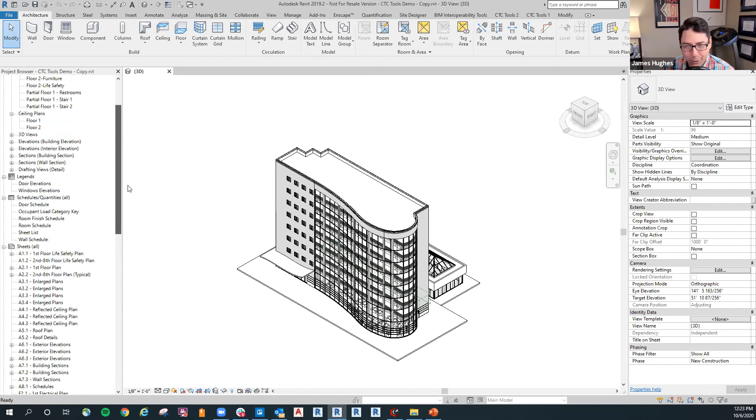And so what ended up happening, all of the large juicy projects started going to, and I'll call him Matt since you're Matt, Matt, the associate, middle management, and then all of the crummy re-roof jobs and parking lot jobs and post office jobs kind of kept coming to the other associates, and they started getting resentful of Matt, and it caused this unforeseen, really awkward political situation.

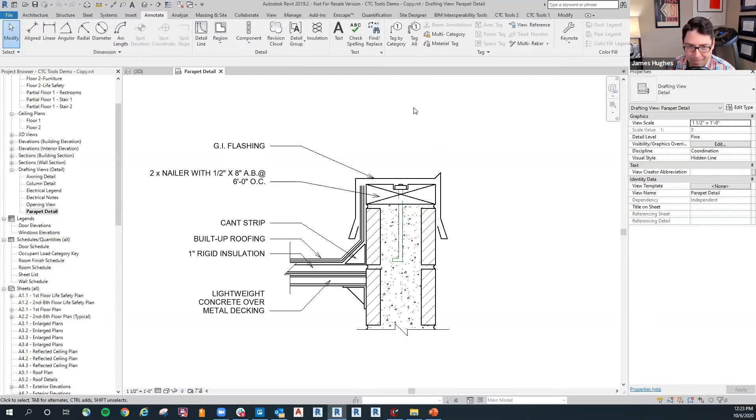And Matt was asking me to help him to be able to deliver these projects. And now all the other associates are upset with me because I'm giving my time to his projects instead of helping them with theirs. So ultimately Matt left that firm and they did not transition. I shouldn't laugh about it, but now I can look back on it and think, yeah, I could see how that would cause a weird political thing that would be hard to see.

Yeah. Okay, James, I just noticed we have had some questions pop in that weren't in the chat, but in the question and answer. Yeah, I've had chat open instead. Yep, there's Q&A. Let me open it too. So we have, what are some of the best practices for migrating AutoCAD detail notes to Revit Keynote system? And then we have a similar question. Do you have a way of implementing user keynotes in a drafting view?

So that's a great question. And there's a lot of discussion about keynotes. There's two basic methods you can go about keynoting drawings. And I'll just quickly show both. And there is a quick way and there's a really good way to migrate from AutoCAD. Okay, so here in the user interface, over here in the Annotate tab, and just a quick note, this is really helpful to new users that I always point out.

We have a lot of tabs up here and you spend most of your time in this one, and in this one. And the biggest difference between Architecture tab and Annotate tab is anytime you're working in this tab, which is grayed out for the most part because I'm in a drafting view. So anytime you're in the Architecture tab, just know that you are populating the model in a 3-dimensional method, and it will populate in all views. Views are simply cuts of your model, okay?

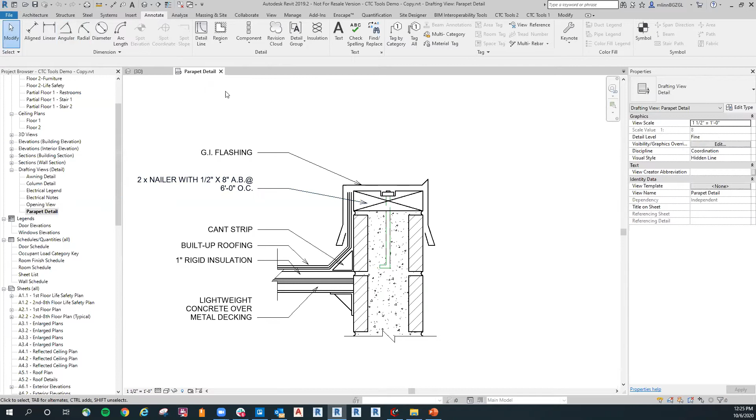By contrast, when you are in the Annotate tab, these are what's called view-specific commands, and it's only represented in the view you're in. So when I use any of these commands, again, Annotate tab in here, they will only be shown in the parapet detail, which is a drafting view. And again, these are grayed out because these are specifically for model elements.

Hey, Matt, this detail, is it still an AutoCAD detail or has it been transitioned over to Revit? It's Revit. Okay. Yeah, I see it now. Yeah, this is Hotel Final. You recognize it, James? I do. That's the parapet detail. Okay.

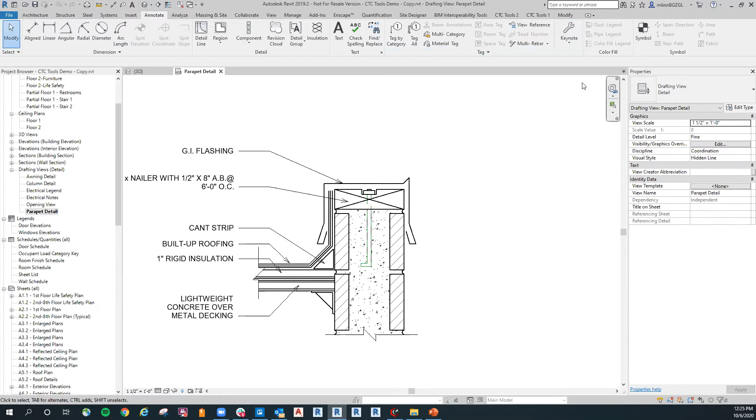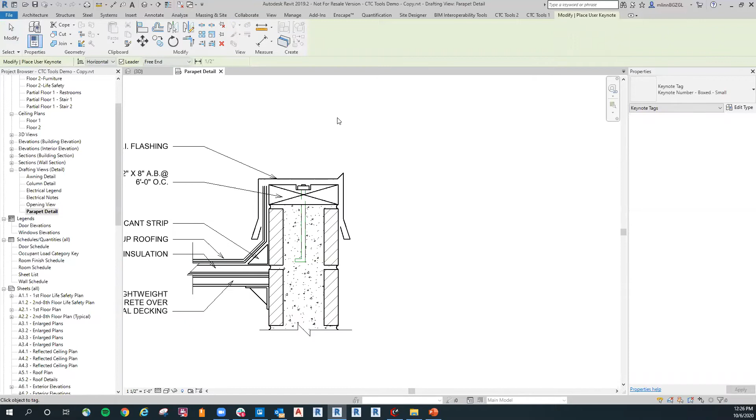Okay, so the first one is using the traditional Keynote here, which is, again, in the Annotate tab, Keynote. And you have several options here, and we're not going to dig too deep into them, but I'm going to use this one for drafting view. And you come over here. This is your type selector, and you can choose any one you want. I'll do Keynote Box. And then, let's see. It's not working because there's no elements to grab. Okay, bad example. I'll come right back to this one.

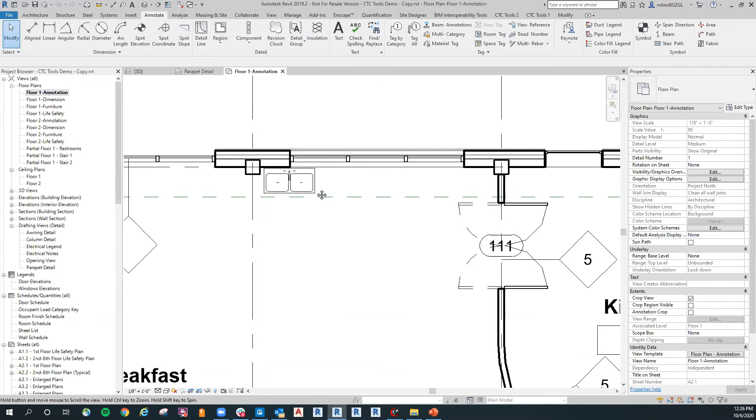Okay, so I'm going to jump over to a plan real quick. Okay, Keynote, and this time I'm going to use Element. Like I said, there's three different options. There's Element Keynote. So if I point to this, it brings up the Keynotes dialog. So specifically, the question was how to migrate from AutoCAD. This entire dialog is reading a text file. So if you have a database in AutoCAD, all you have to do is load this text file into here, and then these become your keynotes.

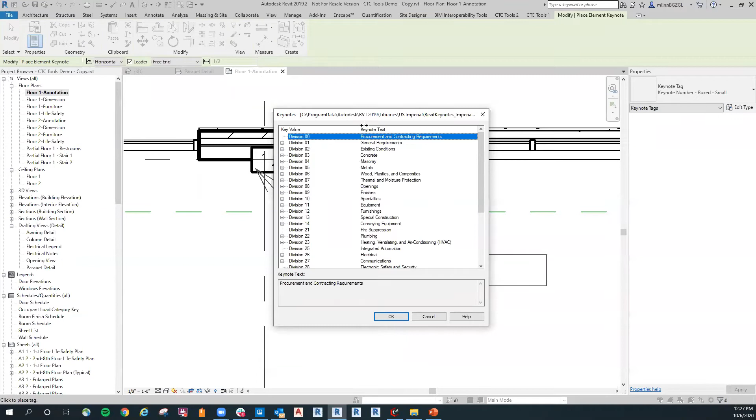Now, this is the one that comes out of the box from Autodesk. And you can see it's divided by division. So what do we have here? We're looking at a column. So I could go to concrete, structural concrete. We'll say that's a 12 by 12 column and say, okay. Okay, and it'll fill out automatically like so.

Got a question from Josh. How did you get the plus?

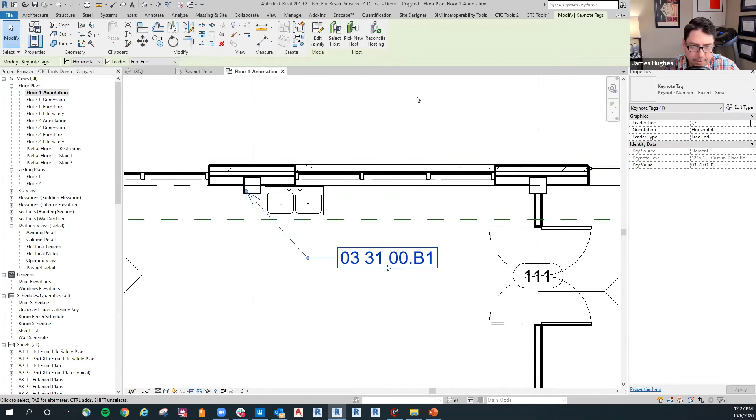The plus. I'm not following. Do you understand? If I knew which plus he meant, I would have said it. Okay. Like, where did the tree come from? Okay, yeah. So as soon as he striped it with the element keynote, it opened up, in that case, CSI division for the keynote, because that's what his keynote text file is written as. Oh, are you talking about these pluses? I think so. Okay, great question. Where did the tree come from?

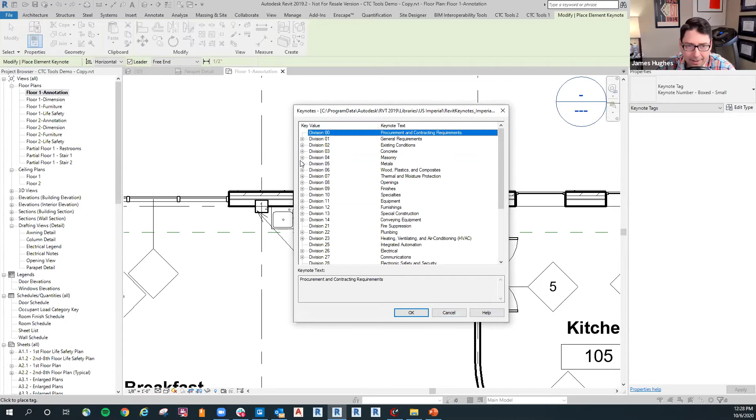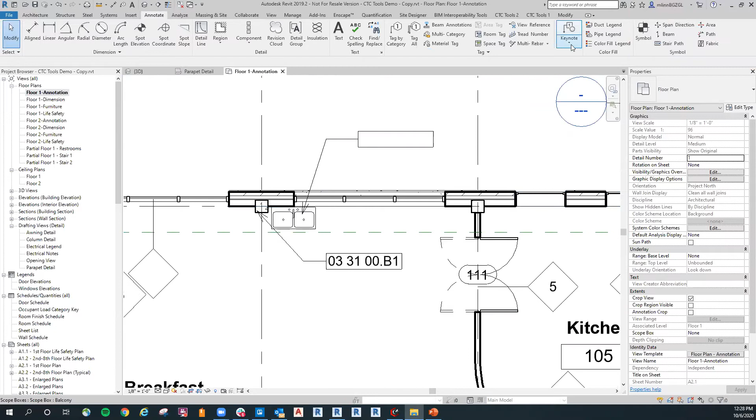Yeah. So the tree is how it's drawn in your text file, and it uses, what is it called? Tablature something. I forget the exact name. James could probably think of it. It's tab something. It's what you call certain text delineated files, or delimited. Yeah, there you go. All right, so if I come to Keynoting settings, here's where it's drawing from. So I'm going to copy this and open this text file.

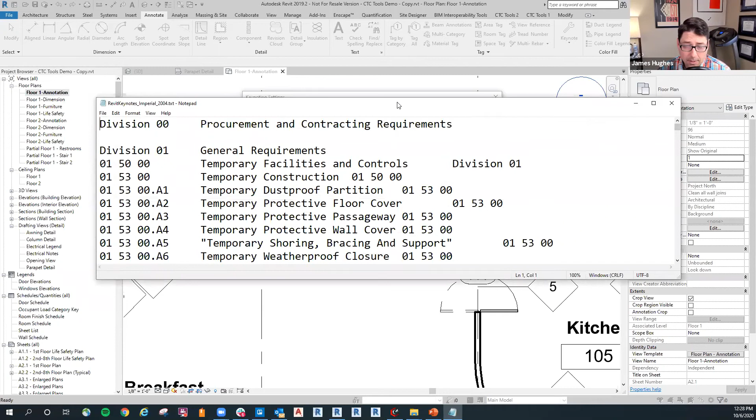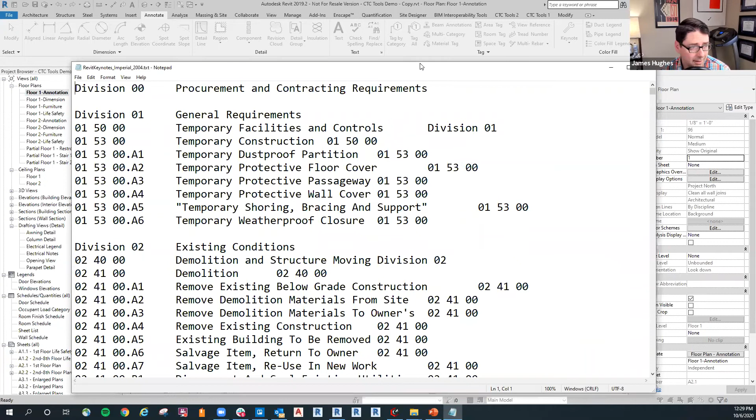I'm working on another screen here. Hang tight. Hey, Matt, the reason why the detail view that you had just a minute ago would not keynote is because that was simple line work. It wasn't brought over to be detail components yet. Now you could change some of those components out to be detail components, and then that keynote system will be basically tied to it.

Okay. Thanks, James. Wow, we're opening up the Keynote file during this presentation. You're trying to spook people. No. I'm just trying to answer the question.

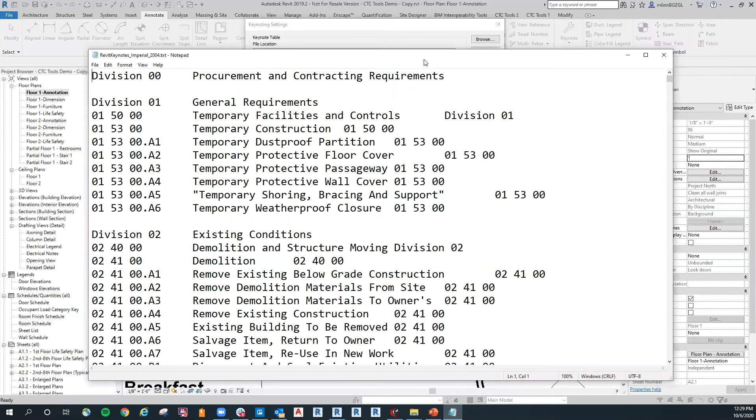So this is relating directly back to the plus sign question. This is simply a tab delimited file. Here's the keynote itself, and here's the description of that keynote. Same thing here, division 0, division 1. Now, there must be one tab between here and here. It's looking for that tab, and that's how it recognizes it. After that, if you have another tab and then something here, it will file this under there. That makes sense? Anytime you have a tab, and you can keep going.

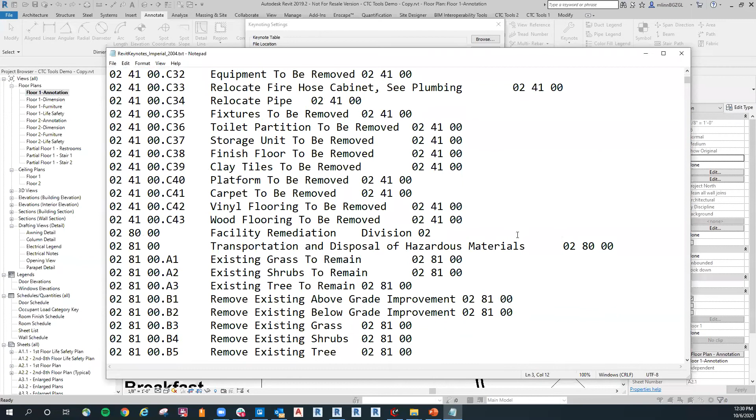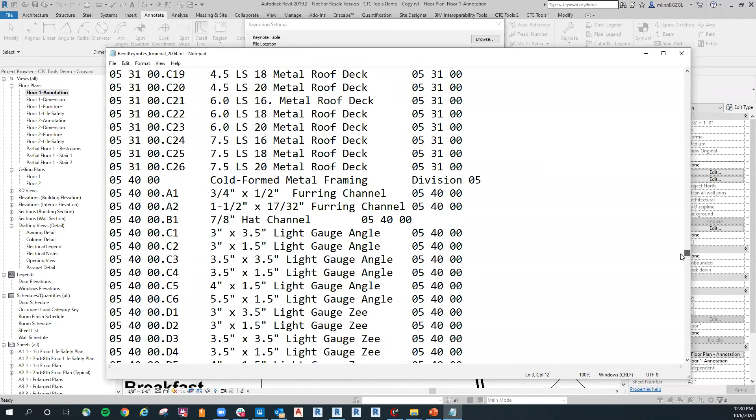So if we go down further, I'm sure there's some examples where... At some point an architect's going to look up and be like, man, I didn't go to school to be a coder. You can work with just the basic CSI division Keynote. That's what most firms start with before they start modifying it, or before they overhaul it. Right.

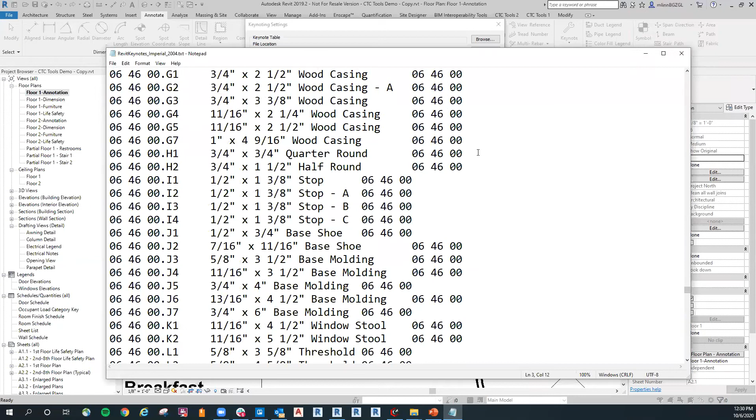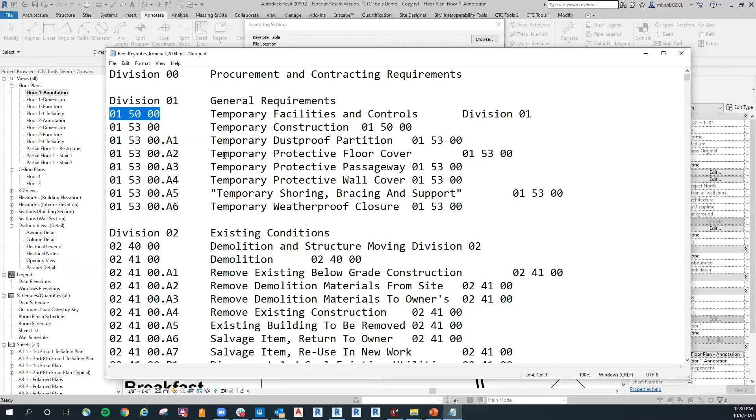Okay, so you can see this one will be filed directly under division 1, and this one will be another plus sign filed directly under this one. So if this does not go all the way back to the top, but here instead, it'll be a second plus sign. So that's how the tab system works. I'm going to come back out. Yeah, and Josh, to answer your follow-up question, that's the out-of-the-box Revit Keynote file. It's just a TXT file that gets installed when you install Revit, and that's exactly what we were looking at.

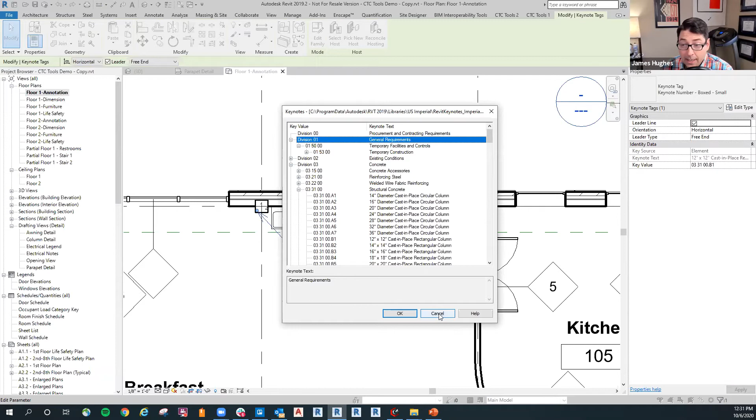Now, Matt, there's 3 different ways to keynote something. Matt chose the user-defined one, which lets him browse to it and assign one. Click on the down arrow under Keynote, and I'll verbally tell you about these other 2. You've got Element Keynote and Material Keynote. Element Keynote you would use if you want to point to a modeled object like the sink. It fills in a parameter value tied to that 3-dimensional element, so anywhere in the model you see that element, whether in section or wherever, it will keynote with that same keynote. And you don't have to use a number system; you can use plain text as well.

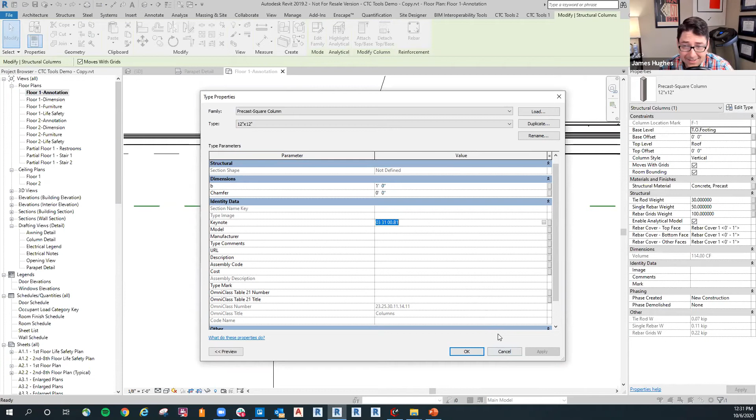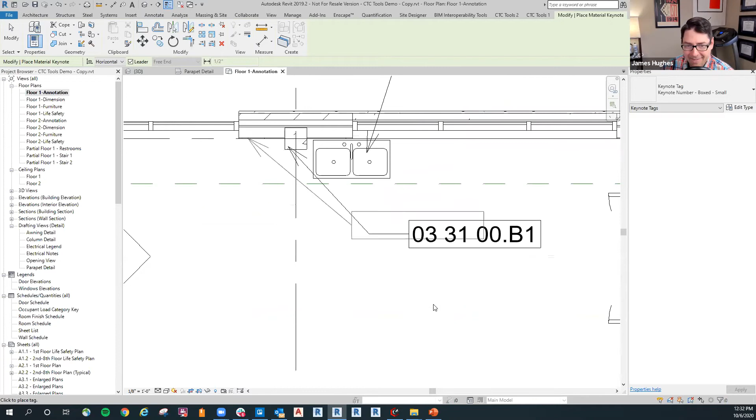The other part is you've got a material keynote. So if you're doing a wall section as an architect, you can point to the sheathing and make it say 3/4 inch plywood sheathing, and it will recognize the material value. Well, actually, I wouldn't be specific and say 3/4 inch plywood because you might have 1/2 inch as well, and it would get confused. But it will park that data with that material, so the plywood itself would have a keynote value assigned to it. And a user keynote is normally going to be for your detail components, which are flat 2D view specific, like flashing.

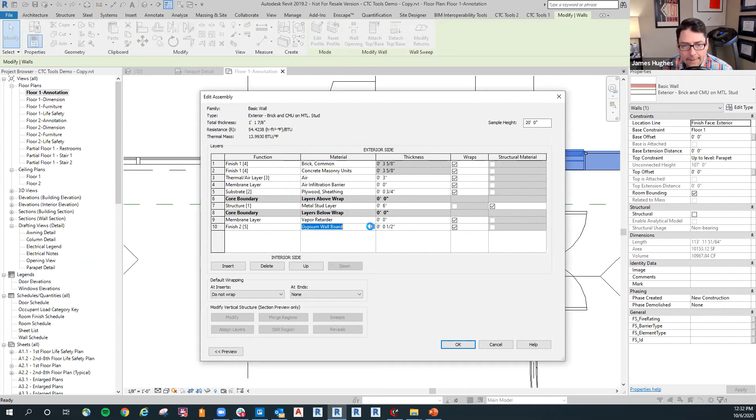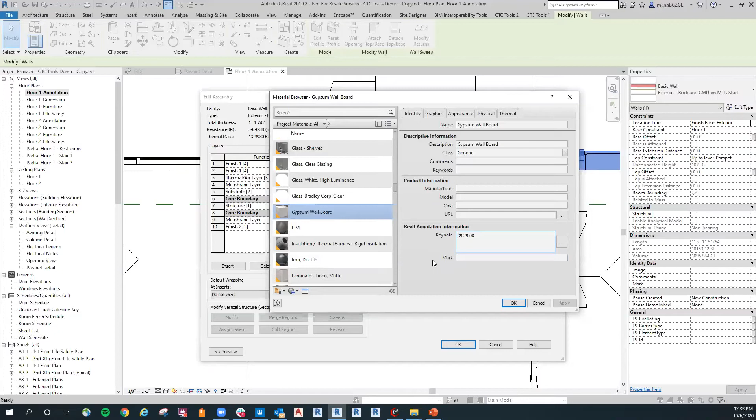Awesome question. So here's a continuation of exactly what James is talking about. In the first case, that parameter value was assigned to the element, as the name implies. This one is a material keynote, applied to the material, and it's indicated right there. So it's just 2 different places of storing that data; you can assign it to either the material or the element itself. And ultimately, they both make it to the same legend. You use all 3 of them, and they'll all make it to the same legend. And the legend populates itself based upon which keynotes are in use on that sheet, which is real slick.

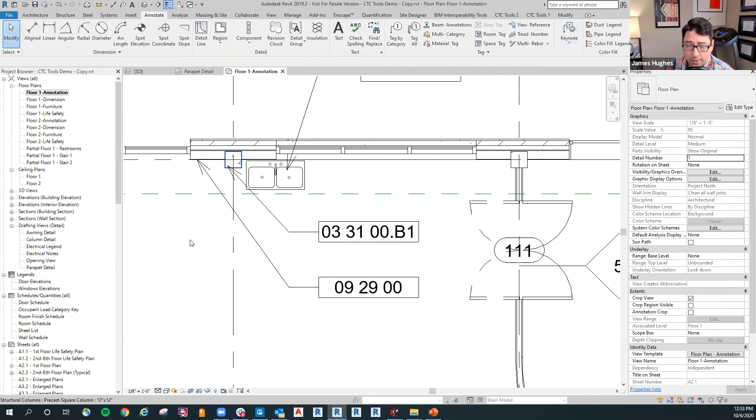You can do it per sheet or per project, either way. Yep. Yeah, some people are like, well, I want to do it per... well, that's fine too. You can do that. I don't mean to impose my own standards on people.

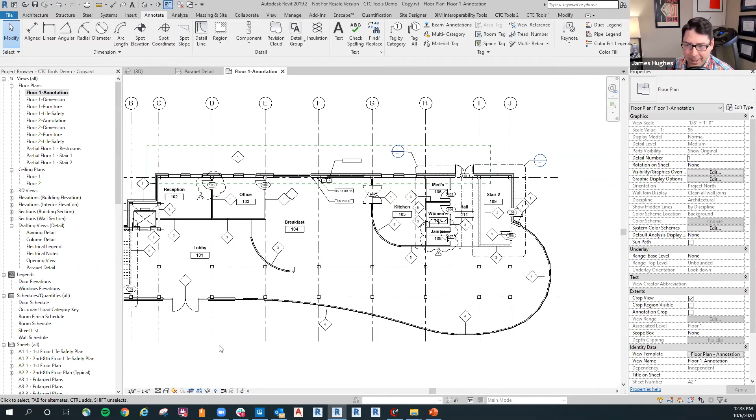So look, another way I've seen a bad transition into Revit is by having a new hire and saying, here's a 4-year-old Revit book that we got from a training 4 years ago. Read up on that because we need you to start such and such project in Revit in about 2 weeks. So chop, chop.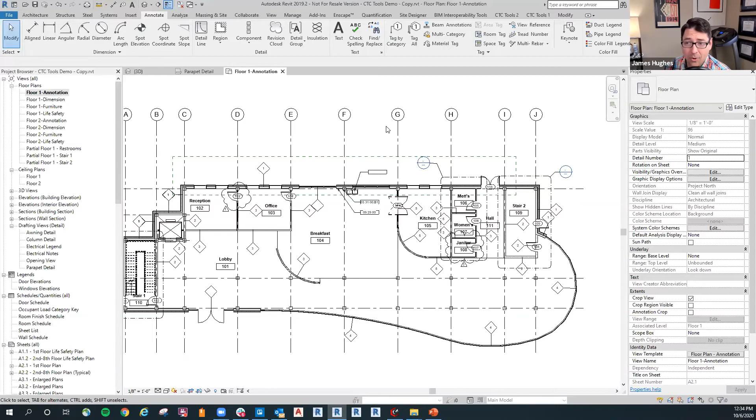I actually had that scenario happen to me here in Central Arkansas, and became a quick study as best I could. Watched a bunch of YouTube videos, and being self-taught, there's nothing wrong with that, but you are going to have lots of fundamental gaps in your knowledge because if you haven't had to solve for a problem before, then you just don't know that thing. And so you don't really build a cohesive foundation where you learn all the things that you should learn together, whether you learn from a book as that structure or you do instructor-led training. Some people are now training in college as well.

Okay, we got a question from Chris here. So Chris says, when looking at a roof in plan view, I'm seeing that the rake edge lines show at the appropriate line weight, but the overhang edge lines are half as thick, sliced right down the center. The valley lines are super thin, less than a number 1. If I use the Linework tool on these lines, it will fix each case. My question is, is there a setting that will fix this automatically?

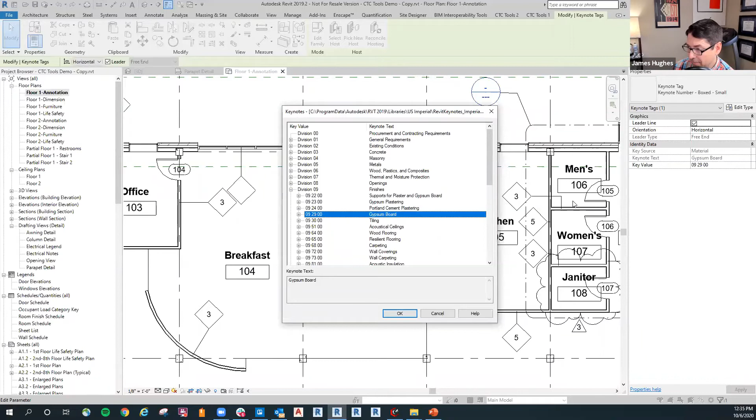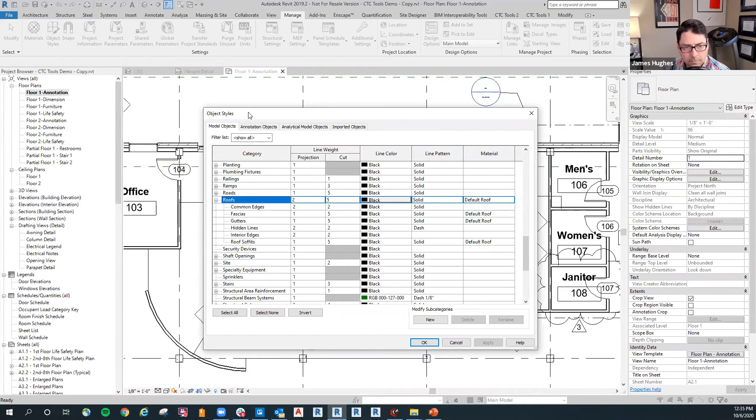You could jump into, okay, you're going to look upstream at object styles. We'll see if it's there first and then visibility graphics. Yeah, expand that. Okay. So yeah, as James alluded to, there's kind of 3 tiers of controlling line weights. I went straight to the top.

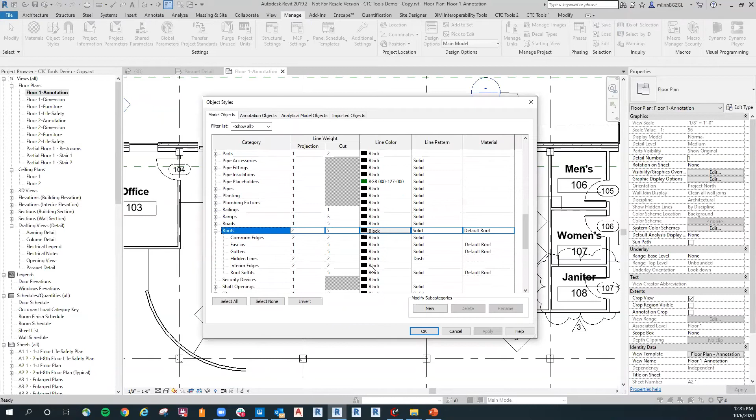Yeah. So if you go to Manage, Object Styles, you can see there are some subcategories specifically for roofs, which you're asking for. And here's where you're controlling those lines. There's your gutter, there's your fascia, there's your common edges, which would be your ridge. So Object Styles is controlling all of the line weights in the entire project unless overridden. Yeah, at the macro level. Yep, this is the top of the tree.

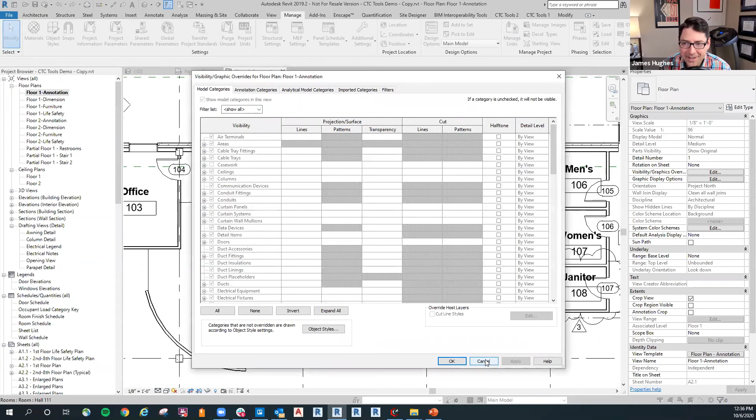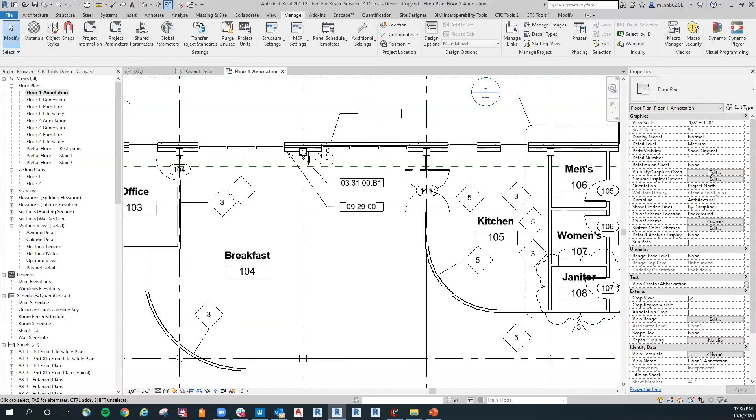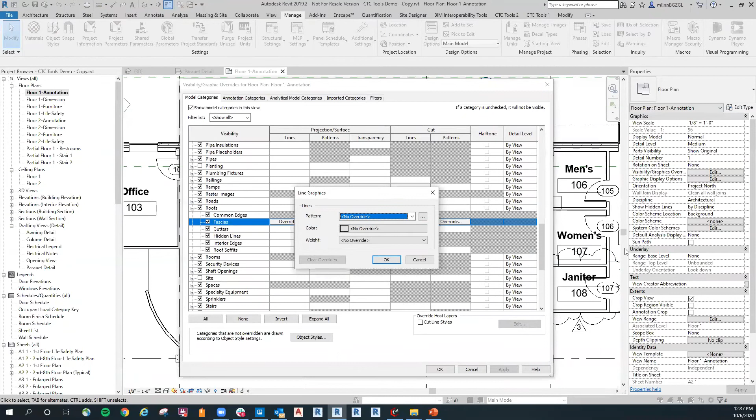And then you can see if you go down to roofs as well, you basically have the same type of options. And if it's white here, it's looking to what we looked at the first time, which is the object styles. Or if you want to override it in this view, you can override it here and change the weight.

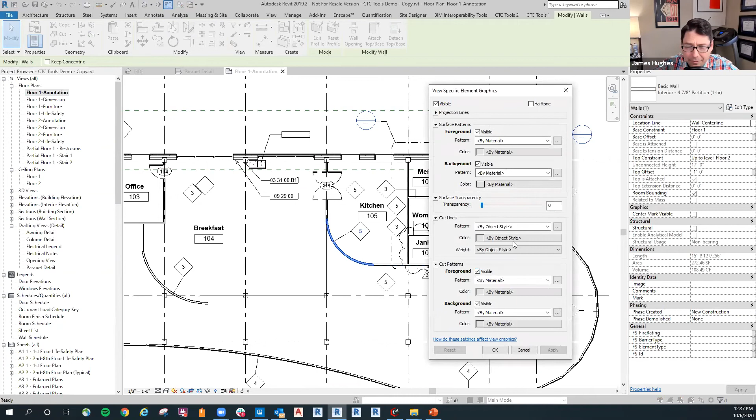And there's one more step downstream from this before you get to Linework, which is where Chris is doing it the most manual way. You can actually click on the roof itself, right click and choose Override Graphics in View by Element. And then that will only make that selection have those properties in that view, but it will still do all of the roof at once. So you don't have to individually stripe each valley with a different line.

Woo! That is an interesting and bold choice there, my friend.

Okay, looks like you want to drive for a bit, James? No, man, you're doing good. I've kind of got my own agenda here because of the same sort of discussions that I have with a firm that's putting together a plan. One of the other things, and I could keep going on about bad ways to transition in Revit because they're making up new ways to do that. Let me talk a little bit about the bell curve of adoption.

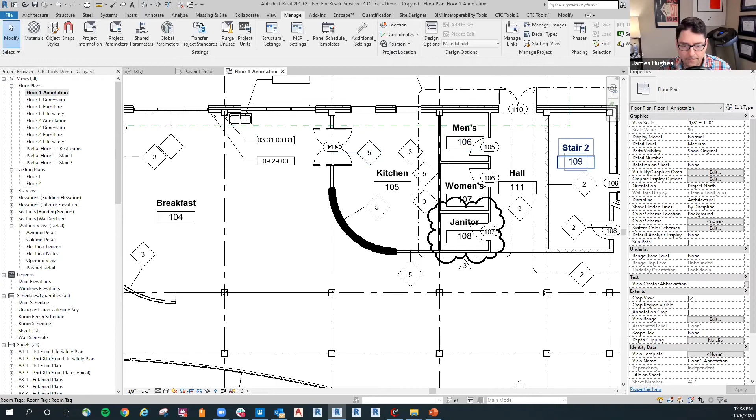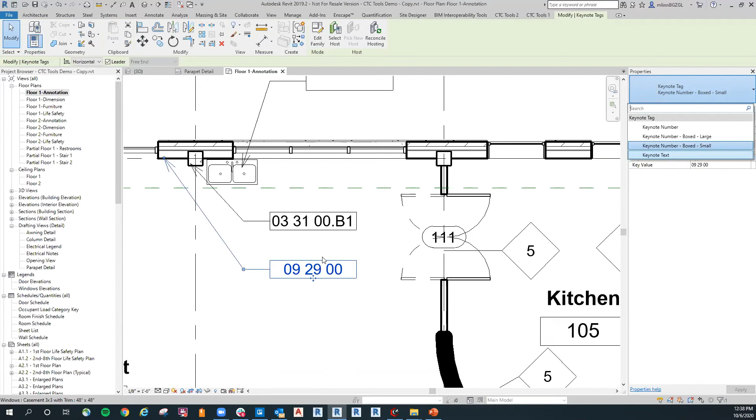Our construction and demo notes are a number with a square or octagon respectively. The notes are documented as a list, and the user references notes via the corresponding number. What is the best? Okay, this is going to be a lengthy answer, and I'll try and shorten it as much as I can. When I grabbed this, this was a specific type of Keynote. In this case, it's called Boxed Small. This is created as a component family, and that pulls the graphics for the Keynote. You could also make one that's an octagon. You could go either way with that. And so that's how you would make those two respectively.

Now, when I started the Keynote conversation, I said there's basically two methods. This is the preferred, in my opinion. I don't know what James thinks. Not for firms in transition. Not many firms transition and jump immediately to doing Revit Keynote systems. Most of them do dumb keynoting because that's what they've been doing, and that's a pretty easy lift for them. Okay, so when James says dumb, what he means is there's the alternative of going with an unintelligent symbol.

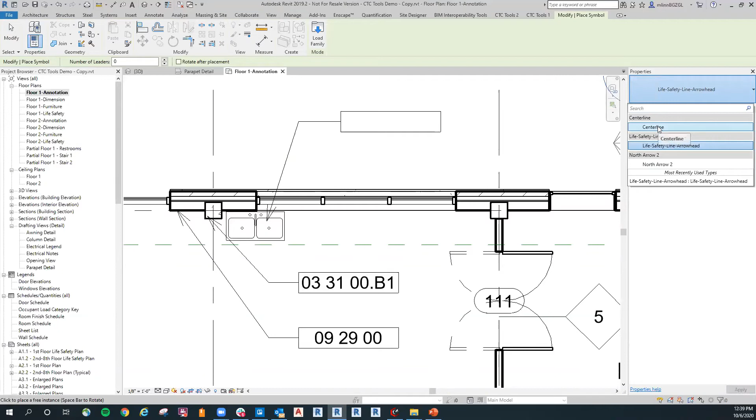So there is a symbol, which is also under the Annotate tab. Again, this means it is view specific. If you go to Legend, here are all the symbols that are represented currently in the project. We have a center line, a life safety arrow, and a north arrow. Now, where did these symbols come from, and why are there only 3 in the project? All it's doing is looking for generic annotation component families. So over here in your project browser, you see your annotation symbols.

So let me back up. There's 2 basic types of family. There's a system family, and those are things like walls and floors and roofs and ceilings. System families are created in the RVT, which is the Revit project, which is what we're in right now. When I say RVT, I'm talking about the extension right here. System families are created and live only within the RVT. Component families are, to put it in AutoCAD terms, more like an AutoCAD block, where you can save it out into its own specific file. Those have the extension RFA for Revit family. Those can be brought into the RVT project for use within the project, very similar to an AutoCAD block.

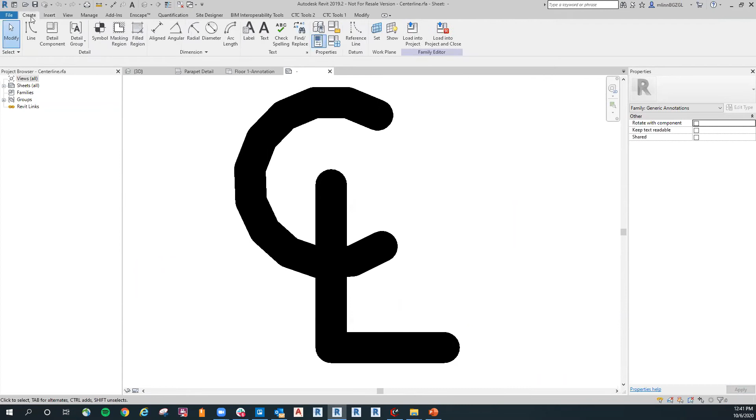So the symbols tool is looking for the component family that has the category of generic annotation. And in this case, we got center line, life safety. If I were to open this family and go to category, there it is, I know it's a generic annotation, and that's why it's populating as a symbol.

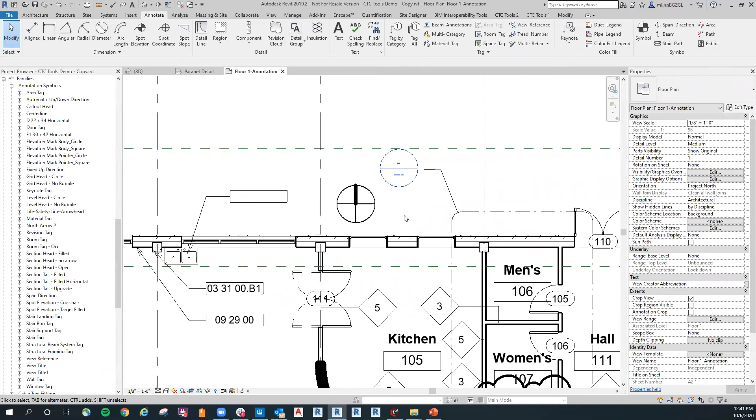Coming back to the question, you can make an octagon or a square or a rectangle, whatever shape you want, and then you can use that as a keynote, and it's, as James dubbed it, a dumb keynote. Yeah, it's just a label with an instance parameter on it, and it lets you click in it and type in a number. You can type in keynote number 3, or whatever you want, just like you do in AutoCAD, and then point it to a thing. It doesn't carry intelligence. It's not going to schedule itself, but it will graphically point to a thing and say a number. And just to clarify, you can schedule the note block itself. So it's not scheduling Revit elements, it's just scheduling the symbol itself.

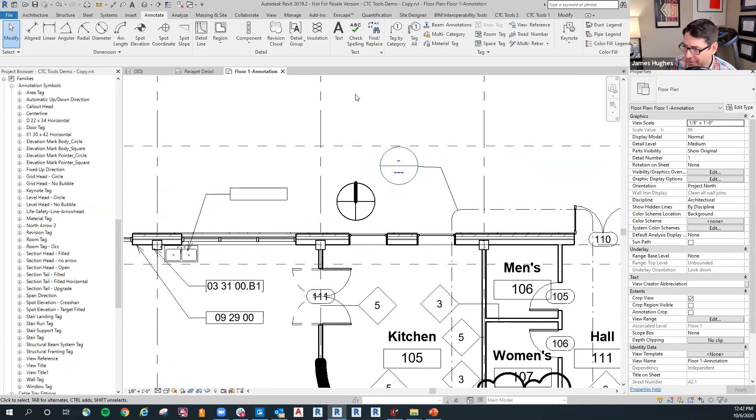Okay, let's move on. So there's a comment from Terry. He says that when you're assisting with AutoCAD and Revit transitions, success depends on 3 things: clear understanding of objectives, a non-change-resistant mindset of users, and commitment from leadership.

Terry, that's kind of the first phase of it, and normally people bring those 3 things when they talk to an ATG. They've already internally kind of resolved, you know, this is what we need to do, this is why. And honestly, some of them can do it before everybody's on board. It's been my experience. I've never actually had a training out of, gosh, about 90 trainings.

I've never had one where someone's sitting there with their arms folded like, yeah, but I bet I could do it better in AutoCAD, you know, which I always thought I would have that. But man, when you get to the point of training, people just get with the program. They're like, you know, this is my livelihood. I'm going to learn a new and beautiful thing. And I might grumble later, but I'm going to get on board for right now.

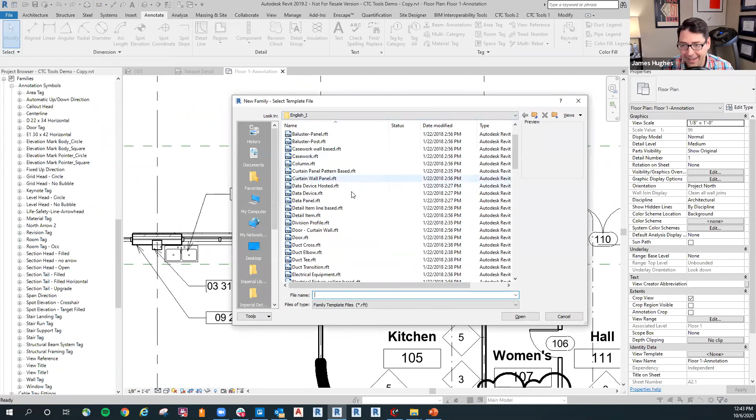But I would add to that, your second phase of sort of implementing or planning, I've basically become convinced that there is only one school or main way to do the transition, and that is sort of a hybrid or a variant of what you might call a cold turkey method. Although true cold turkey would be like, as of this date, drop what you're doing. We're a Revit shop now. I don't recommend that.

But I think what I've seen successful is when you set a timeline in the future, preferably somewhere around a month and a half to 2 months in the future, preferably there's something that's kind of forcing that, or it's really advantageous if you deliver via Revit starting on that project in a month and a half to 2 months. And so you've got that as your end goal. It's kind of a medium range end goal. It's in the same business quarter.

And then the most important part is that new projects from that day forward are going to start in Revit, but all of them that were already started in AutoCAD stay on in AutoCAD because it's not worth transitioning those. And then the third component that's important with that is to make sure that your users have all of the training that they need to be successful. I said 3, there is a 4th.

You need to make sure that your Revit template is in good shape. It doesn't have to be perfect. It will not be perfect for a newly transitioned firm, but you need something in place that has a title block plus about 20 other things. And we've kind of got a list of things that we create whenever we create templates for firms. And we can make that available in links or something after this.

I don't know how we'll do it yet, but if you guys want to sort of run down a checklist of ATG said our template needs to have these 20 things, then that's helpful to make sure that your template's in shape and you've trained people and you've got an objective a month and a half, 2 months out, then you're set to go. Now I've said my piece. We can get technical now that I've provided an overview of how you plan for a transition. But I would completely agree with Terry's comment, though.

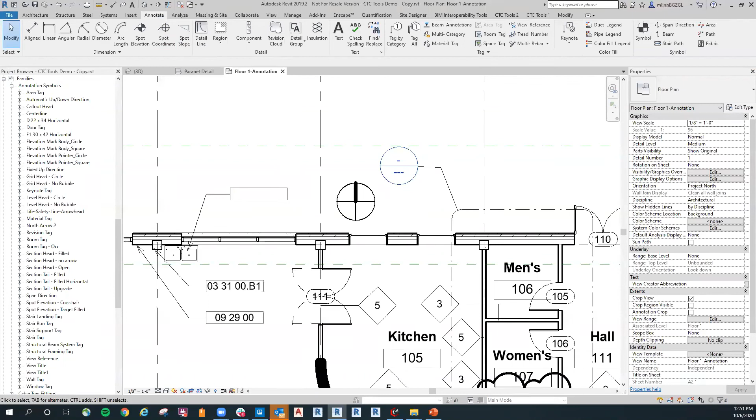So anyhow, like I mentioned before, you need a variation of the cold turkey method to be able to swap over. That's what I have seen almost 100% success with. And we check back with firms and see whether or not they've actually implemented it and are using it. So if you've got a pressure deadline or deliverable that's driving the whole thing, that's the best measure. And then all the 7 things that between Terry and I we've mentioned, you put all of that together in a plan that's not a long-term plan. It's like a 2-month max plan, and you've got everything that you need to be able to transition properly.

If you don't train people or you don't have a template, you're going to have a rough time. And so it is absolutely worth the investment to not just put together a plan, but to provide all of the ingredients that you need for success.

You're also going to discover that it's mostly a perceived risk. And it's easy for me to say, but when a firm looks at what their schedule is like delivering an AutoCAD deliverable, and they think, man, how long is it going to take for us to get up to speed to that? There's this kind of feeling that their world will kind of crumble down. And I actually don't know of any firms that did a transition to Revit and it caused an implosion of their business. It's mostly just kind of a perceived or a felt risk.

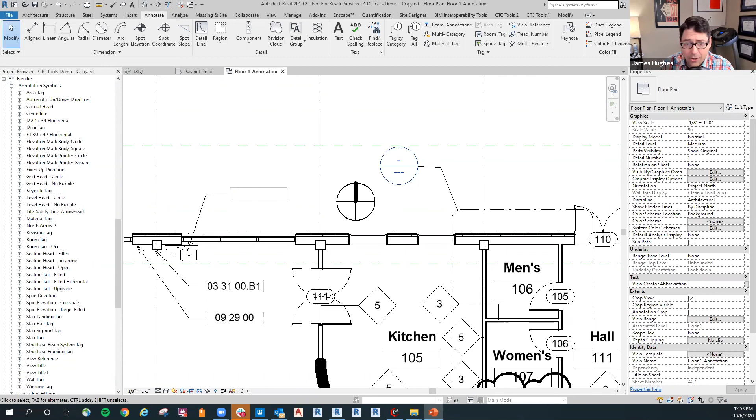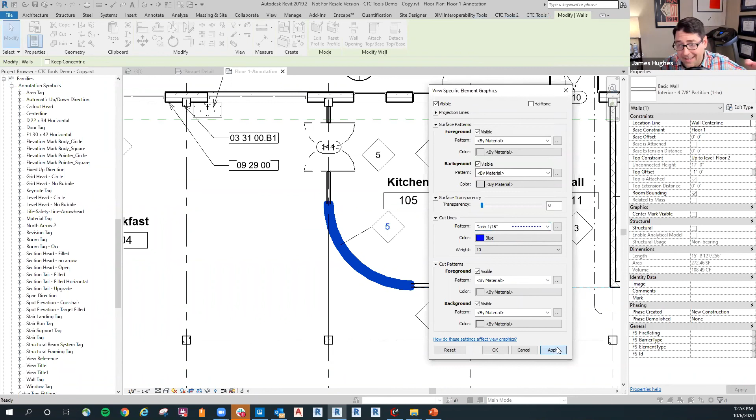That doesn't mean it's not real. You still need to take steps for that success, but that should embolden leadership to be able to say, look, all of our peers pretty much have done it. Now, I didn't talk about the adoption curve, but Revit was purchased around 2000 by Autodesk, and until 2007, you had only 25% of adoption. This is a McGraw-Hill study that they did, I think around 2013. And so you had 25% adoption by 2007 over that 7-year span.

And then from 2007 to 2012 is the 25th to the 75th percentile. So that's the hump and the other side of it. And so by 2012, 75% of your competitors have transitioned over to using Revit. I joined ATG in 2015. I've kind of been chasing the long tail of adoption, people that have good reasons why they have stayed in AutoCAD, and firms that have had bad reasons. We know this and we can deliver by this.

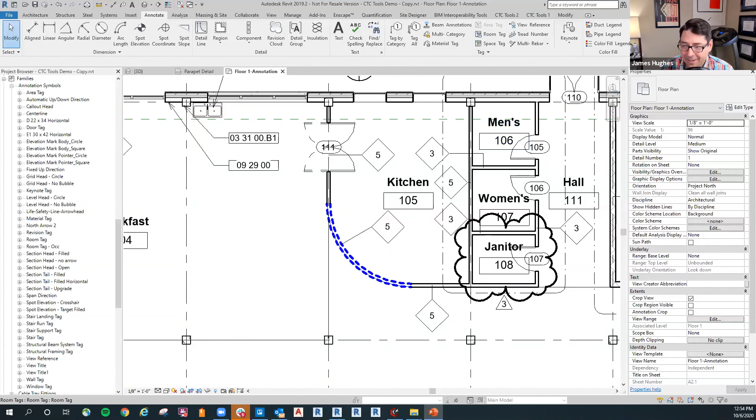So, that's pretty fast. Laggards. We're not calling anyone laggards or Luddites. I'm incredibly gracious and understanding of firms that have their reasons for staying in.

Can we explain work sets? Verbally, absolutely. If you're in an AutoCAD workflow, if you're smart, you get in early in the morning and you open every project you might touch that day. Floor plans, elevations, all of it, and that locks your coworkers out and they can't make changes on you. And so that's how the AutoCAD system works.

Inside of Revit, instead of you having 50 DWG files for a typical project, you have one RVT project file that everybody works within. And so when you set up work sets, you are basically enabling the project to be used by multiple users. If you're using Revit LT, you can't do this. That's the main reason why you shouldn't use Revit LT unless you're a sole proprietor. If you have multiple people that need to get into a job, you turn on work sets on day one.

That creates a central model, and then that acts as a referee or as a librarian to check out segments or parts or components of the model on a first come first serve basis, which is how most architecture firms do it. They just accept the default work sets. Or if you've got a larger project or you're a multidiscipline firm, you can actually create work sets and place certain kinds of things into that work set.